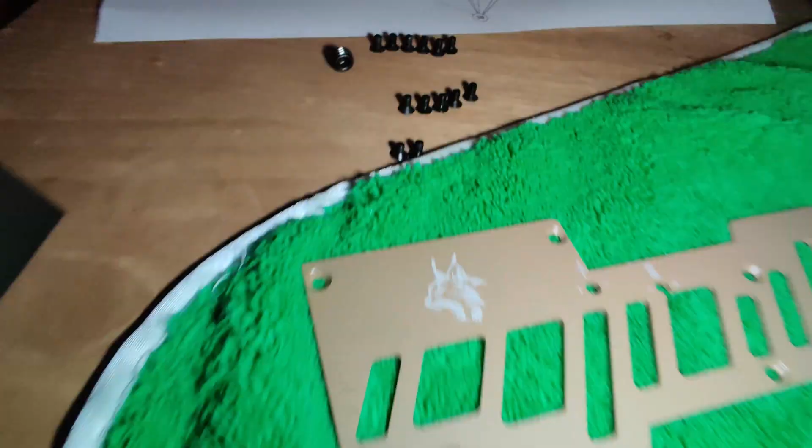The first step is to take out the hammer spring screw, the hammer spring, and the screws of the buttstock. Next, I remove these metal plates very easily, held by small screws. One side has 7 screws, the other side has 6 screws.

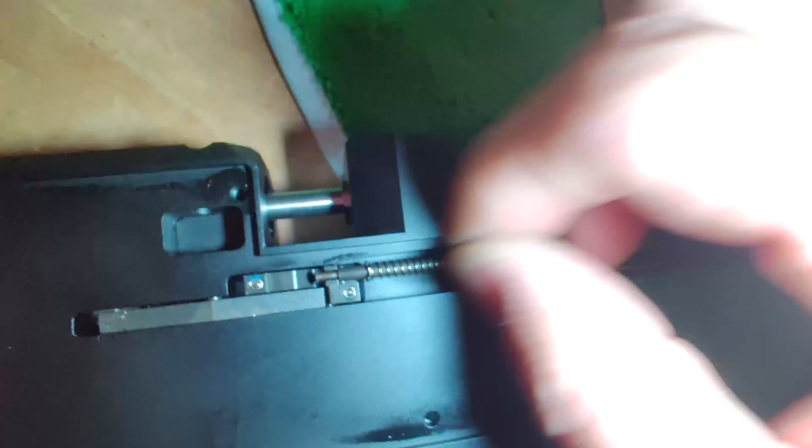Nicely you can see the trigger mechanism. Just pull it out and put it back in with the spring. It's easy. I need to remove this block, so I need to remove the shroud.

I also took off the bottle. It's here, you can just unscrew it. So next up is the shroud.

To take off the shroud, you need to loosen these 6 screws, one by one, and then you can just screw off the shroud counterclockwise.

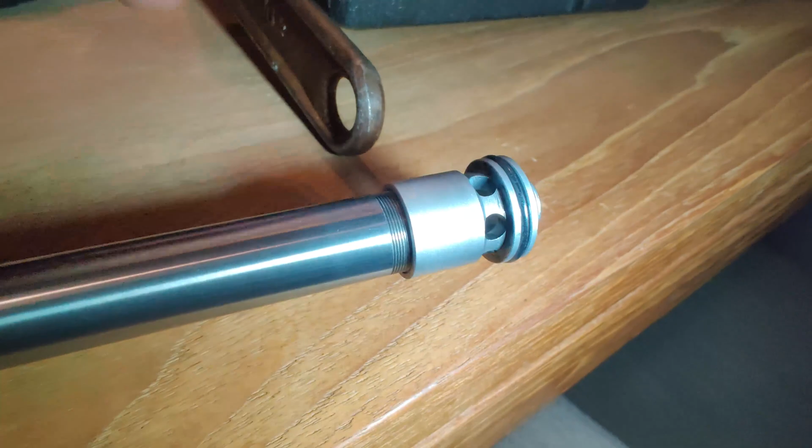Now the barrel has to come off. It's a very nice barrel, with the RTI logo. There's a big screw here you have to take out, then you can take out the barrel.

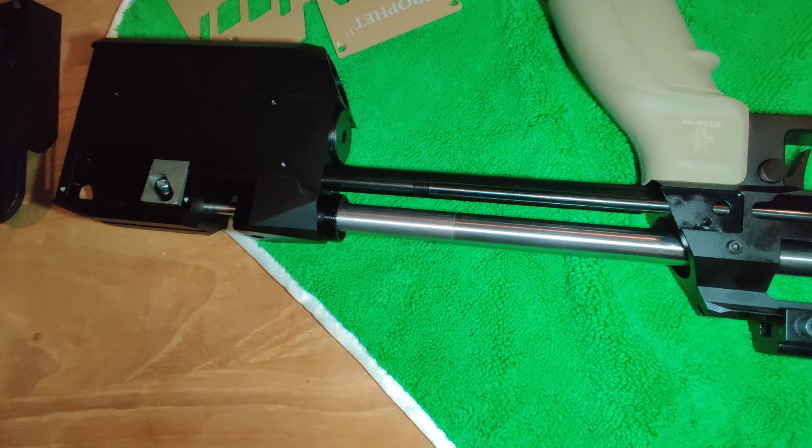The only thing holding everything together now is the linkage for the cocking mechanism, the pressure tube, and on the other side the trigger mechanism. So I'll first have to find out how to take this one out.

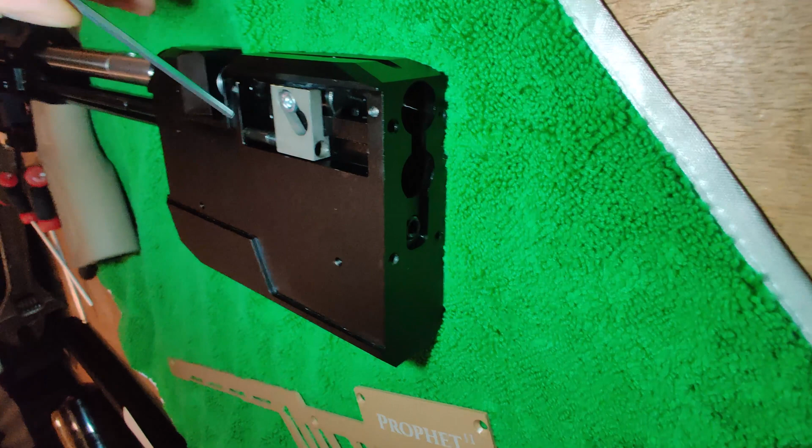By removing this screw, which is quite tight, you can rotate this short rod like this, and then you can remove this part.

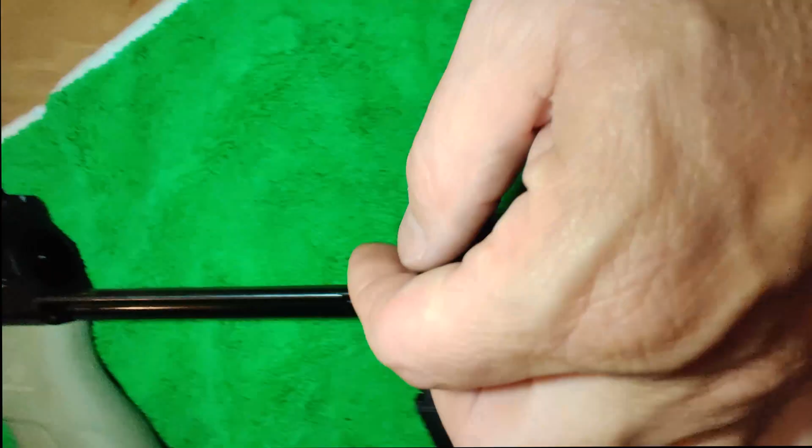Just removing the screw from this end wasn't enough. This short rod cannot be rotated far enough to loosen this part, so you also need to remove that screw, which is here.

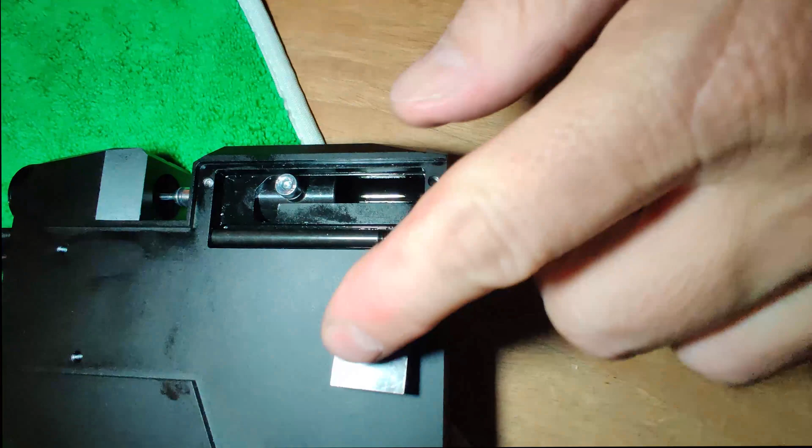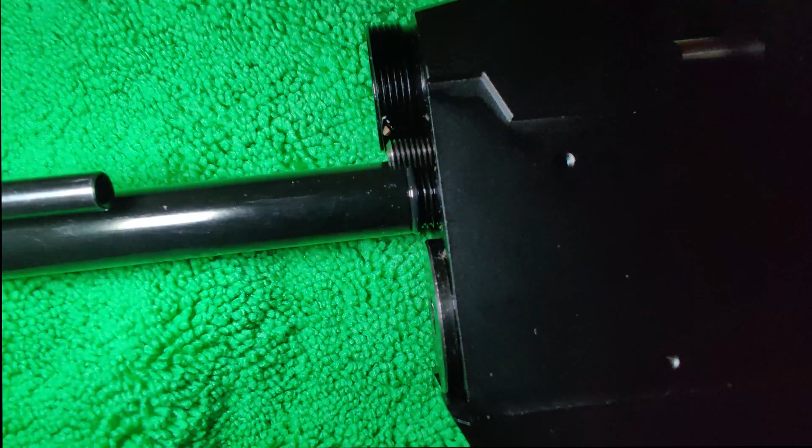And then you can rotate the complete rod, and take off this part. Then if you also unscrew the trigger linkage on the other side, you can rotate the block, which is also screwed in, and the black block comes off.

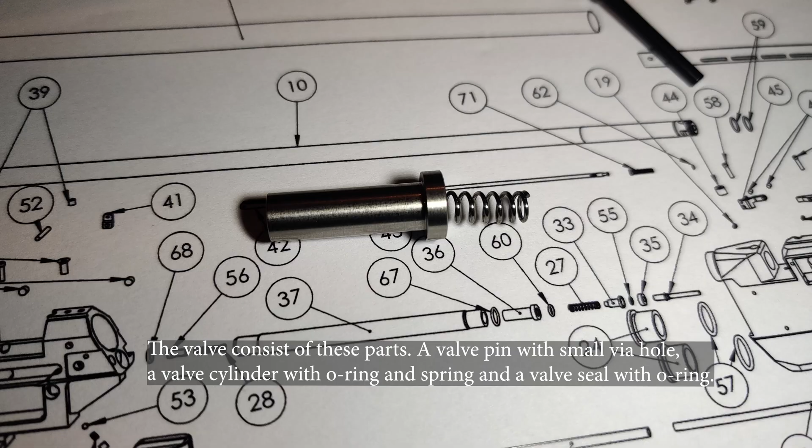So when the block is screwed off, this valve comes out of the block. It consists of a tube with a spring and an O-ring inside, and a valve stem with a small hole, and a small hole on this side.

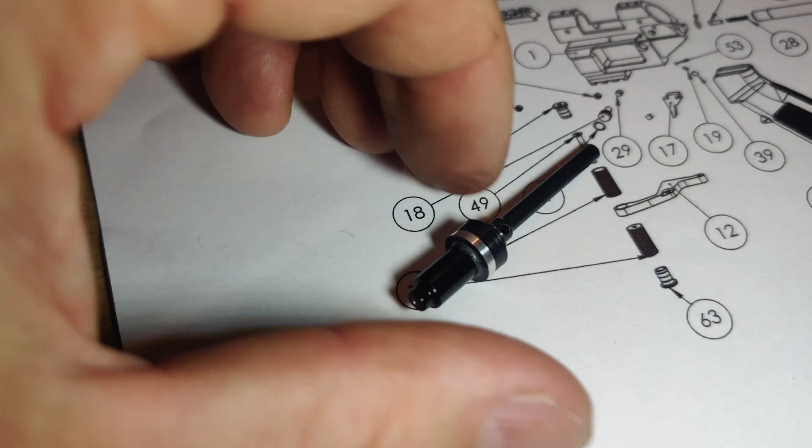So that's how the pressure assisted valve works. Air is let between this piece and the plenum.

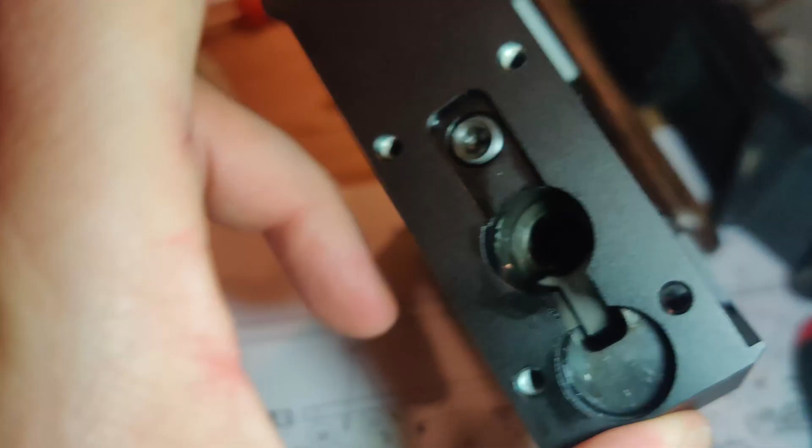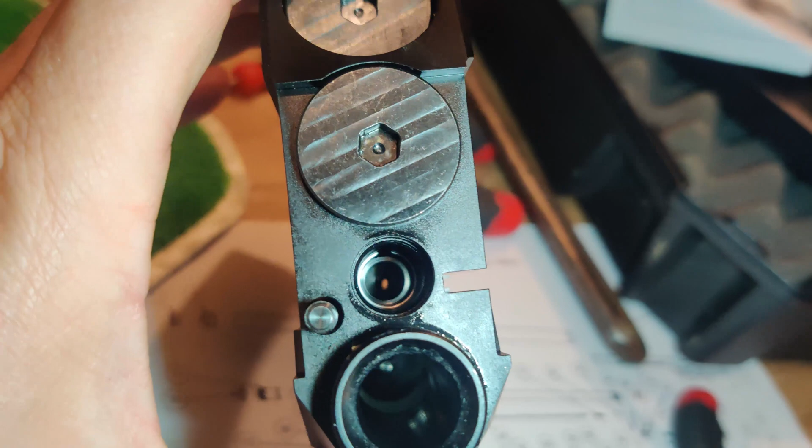If you look inside, you can see an opening in a circle, shiny. There's a hole over there that leads to the plenum here, and this piece comes against the metal part just before the plenum hole.

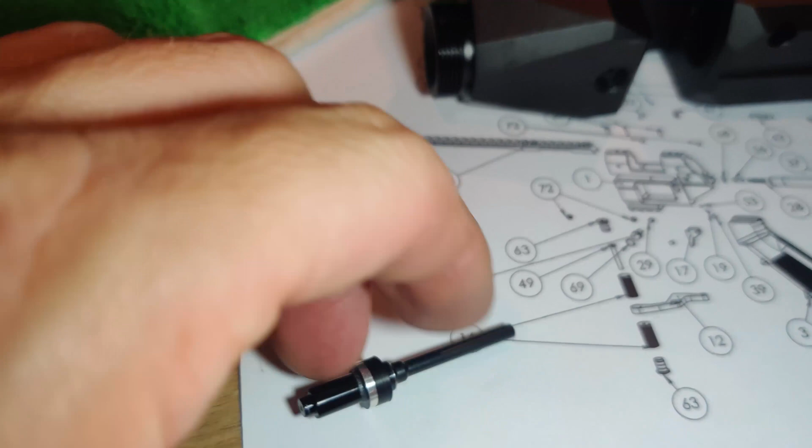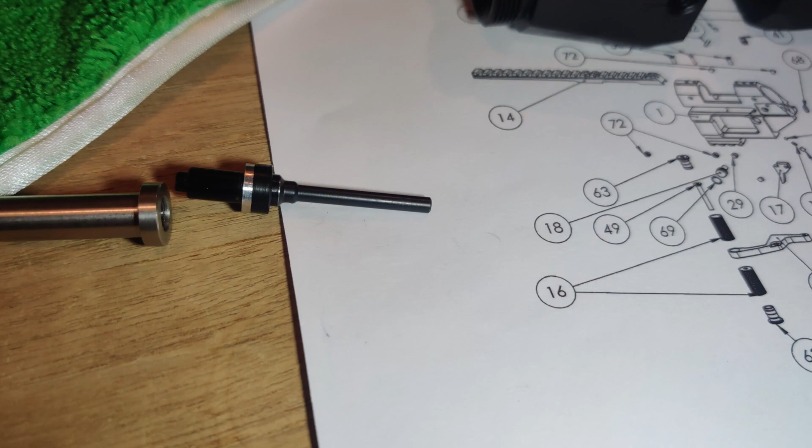This is going deeper in and sealing off the air. When the hammer hits this piece, air is let through and pressure goes into the hole, out of this hole, and then pushes back in the valve stem and the seal.

This piece can also be screwed apart, there's a small O-ring in between. I'm not sure what is causing the leak. Maybe the valve seal is not good enough anymore. I'll polish that and see what happens.

When you screw it back together, the block can be screwed in all the way, and it aligns nicely with the rest of the gun.

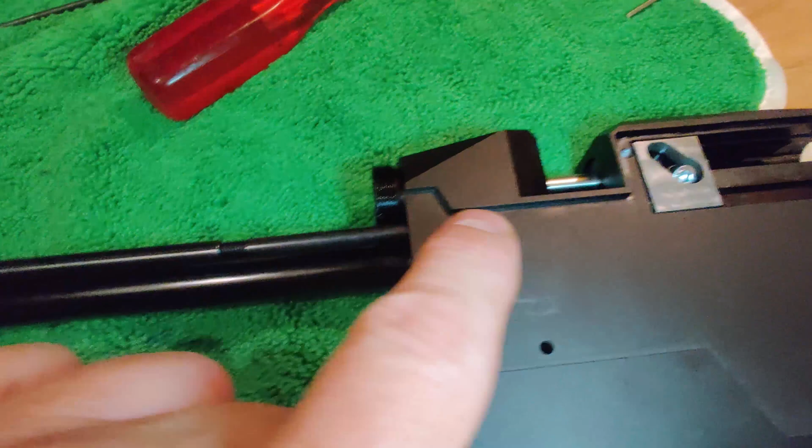For this piece, first you screw in that one all the way to the end, and then you have to check that when you move the pellet pusher forward, there's a small gap like this. I don't think it's that critical, because in the end the pusher is behind the blocking here, so it should be okay.

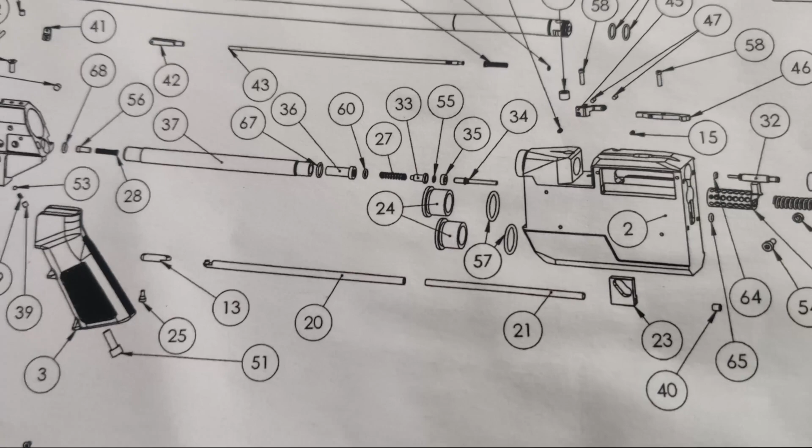So I took the gun apart quite a few times. Not sure in the end what fixed it, but probably this ring, or that ring in the valve, was the problem.

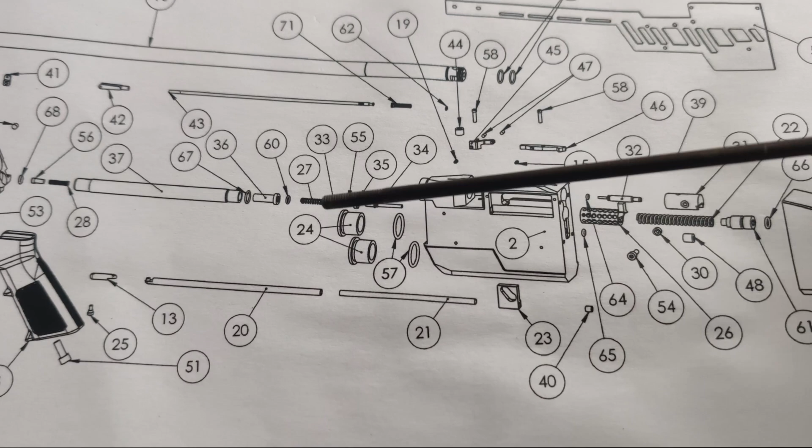But I didn't put enough air in to stop the main valve here from leaking. So in the end, when I put more air in and fired the gun one time, everything stopped leaking, although I already cocked the gun to be sure the hammer didn't push the valve stem.

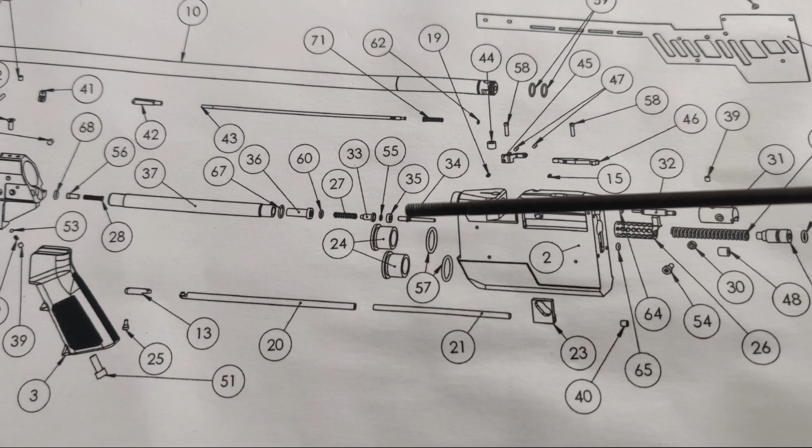Anyway, this small ring, 4 by 1 millimeter, is between the valve seal and the valve screw, and this ring, 5.5 by 1.5, is for the pressure assisted valve mechanism. So now it's time to...